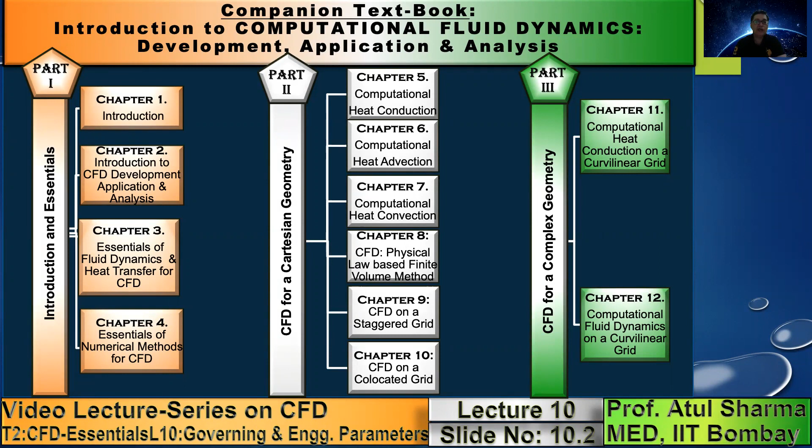This lecture 10 is on governing equations and engineering parameters, which corresponds to the topic 2, essentials for computational fluid dynamics. This topic corresponds to the chapter 3 of the companion book, the essentials of fluid dynamics and heat transfer for CFD. This lecture is the last lecture corresponding to the essentials of fluid dynamics and heat transfer for CFD.

So this lecture is on governing equations and engineering parameters. In the previous lecture, I had presented the essential concepts of fluid dynamics and heat transfer, starting with physical laws, where I had presented mass, momentum, and energy conservation laws, and the Fourier law of heat conduction and stress-strain rate relationship as the subsidiary laws.

After presenting the physical laws, diffusion and advection are presented as the transport mechanisms for momentum and energy transport. In the last lecture, the initial and boundary conditions, which act as a jury to any fluid dynamics problem and dictate the solutions, are presented. Finally, the last essential concept of fluid dynamics and heat transfer to learn CFD is presented in this lecture, which corresponds to governing and engineering parameters.

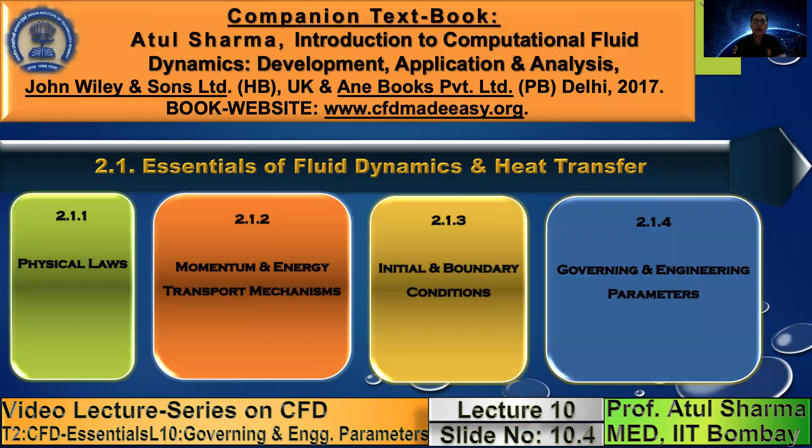Whenever you study a fluid dynamics problem or any problem, there are certain input parameters and there are certain output parameters. So these governing parameters are the input parameters and engineering parameters are the output parameters corresponding to a fluid dynamics problem.

The definition of these parameters: governing parameters are the input parameters that govern or affect the results in fluid dynamics. To give an example, if you consider flow across a car, then the speed with which the car is moving, the dimension of the car, or the fluid in which the car is moving. These are the parameters that govern the results, which may correspond to the flow field near the surface of the car, or the drag force which acts on the surface of the car.

So the speed of the car, the geometrical dimensions, and the fluid in which it is moving are the input parameters that govern or affect the result in fluid dynamics. If you change the speed of the car, the result, the flow near the surface of the car, as well as the drag force will change.

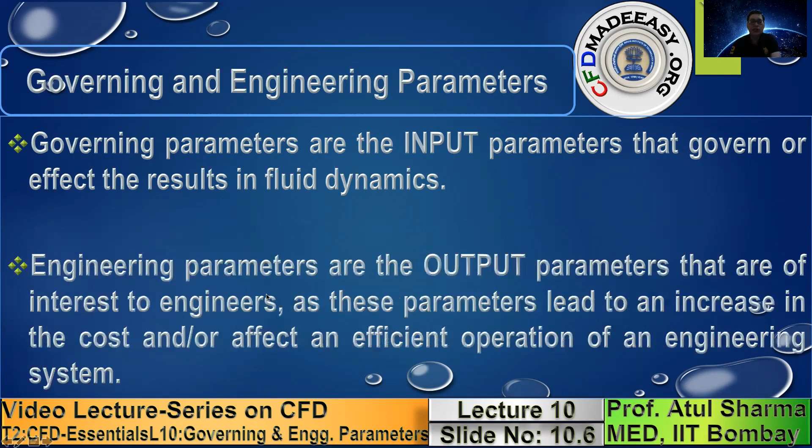Engineering parameters are defined as the output parameters that are of interest to engineers, as these parameters lead to an increase in the cost or affect the efficient operation of an engineering system. Again, if we consider the example of flow across a car, then the fluid dynamic output parameter which we are interested in is the drag force.

And the drag force leads to an increase in the petrol consumption, fuel consumption, which increases the maintenance cost. And if the drag force is large, then you have a low fuel efficiency. So it affects the efficient operation of the car as an engineering system. So this lecture is focused on input and output parameters corresponding to a fluid dynamics problem.

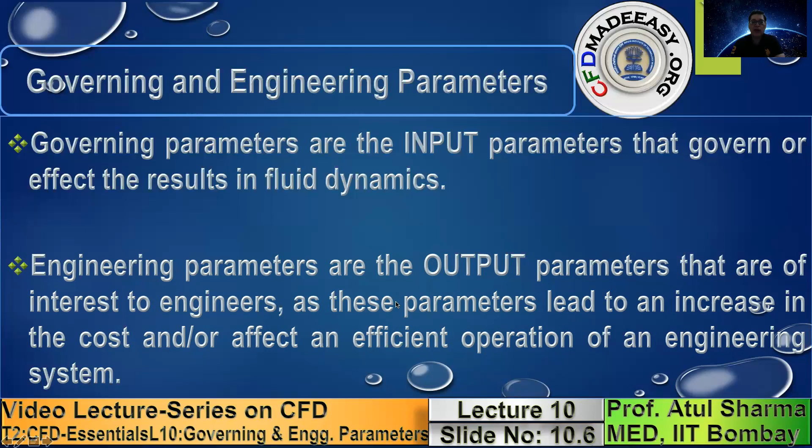Now there are three types of governing parameters. As I mentioned, the thermophysical property of the fluid considered for a fluid dynamics problem governs the solution. Along with it, whenever you solve a fluid mechanics problem, there is an interaction of a fluid flow with a solid. Like for flow across a car, the fluid is interacting with the surface of the car. If you consider flow in a pipe, the flow inside the pipe is interacting with the surface of the pipe.

And the geometrical parameters, like for flow in a pipe, the diameter of the pipe and the length of the pipe, govern the solution. For flow across a car, the dimension of the car affects the solution. So along with the thermophysical property, the geometrical parameter is another type of governing parameter.

Other than this, there are certain boundary condition related flow parameters. Like for flow in a pipe, the velocity at the inlet of the pipe is the boundary condition related input. And for flow across a car, the speed with which the car is moving is one of the boundary conditions which govern the solutions. These are the three types of governing parameters.

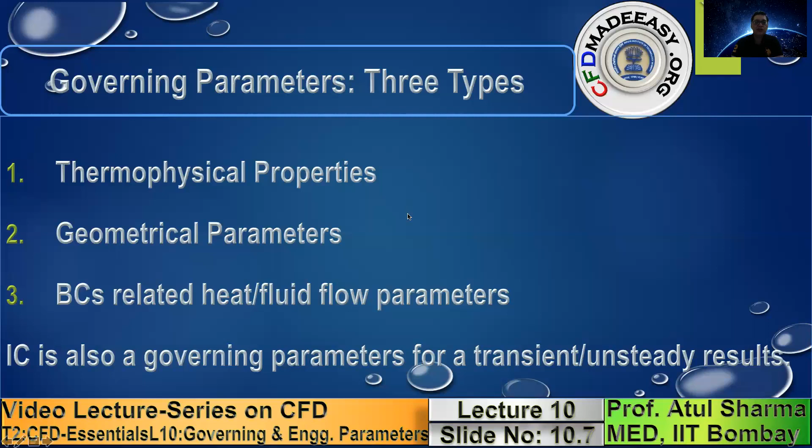After the input parameters, the engineering parameters which are calculated are mostly calculated at the surface or boundary of a solid for an external or an internal flow problem. Let us consider flow across a car, which is an external flow problem. The parameter is drag force. It is calculated at the surface or boundary of the car, by calculating the viscous forces and pressure force which act at the surface of the car, and we do the surface integration of these pressure and viscous forces. Similarly, for flow across an aeroplane, we consider the variation of pressure and the viscous forces on the surface, and then calculate the lift force.

If you consider flow in a pipe, we can calculate the pressure drop by calculating the wall shear stress or the shear force on the surface of the pipe. So in a pipe, we do the surface integration of the viscous stresses at the surface of the pipe. Whereas in case of an external flow, a car or an airplane, we consider the viscous as well as the pressure forces to calculate the lift and drag force.

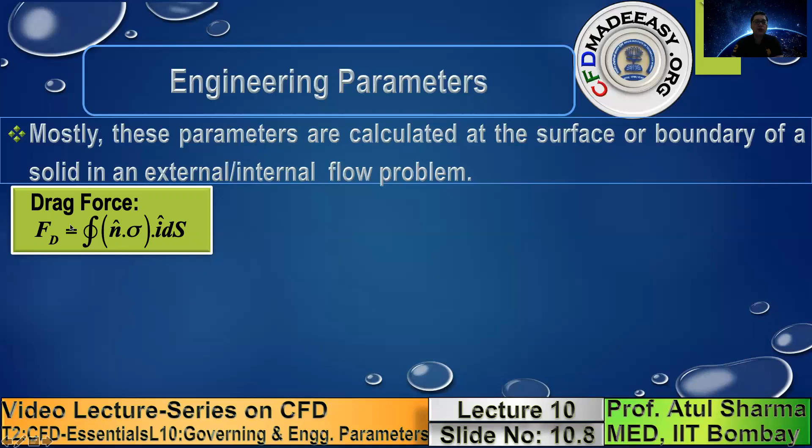So this output parameter involves the calculation of the parameter at the surface: for flow across a car, the surface is the surface of the car, and for flow across an airplane, it's the surface of the airplane. This is the expression for the surface integral which is used to calculate the drag force. This is a cyclic integral because we calculate the fluid dynamic forces, drag force as well as lift force, by considering the pressure and viscous forces all over the surface of the car. The complete surface is considered, so that's why it has been shown as a cyclic integral.

I will take an example problem for flow across an inclined plate to discuss this in much more detail, where in the integrand, sigma is the total stress which corresponds to pressure as well as the viscous stress, and n is the unit normal vector of the surface. However, the surface of the car is a curved surface. So if you take various points on the surface of the car, the direction of the unit normal vector will vary.

So the integrand here is a vector term because it's a product of the second order stress tensor with a normal unit vector, and I had presented in my earlier lecture that the dot product of a second order tensor with a unit vector leads to a vector. And if you take the x component by taking the dot product with the i unit vector, you obtain the x component of that vector, which is called the drag force, and the y component is called the lift force.

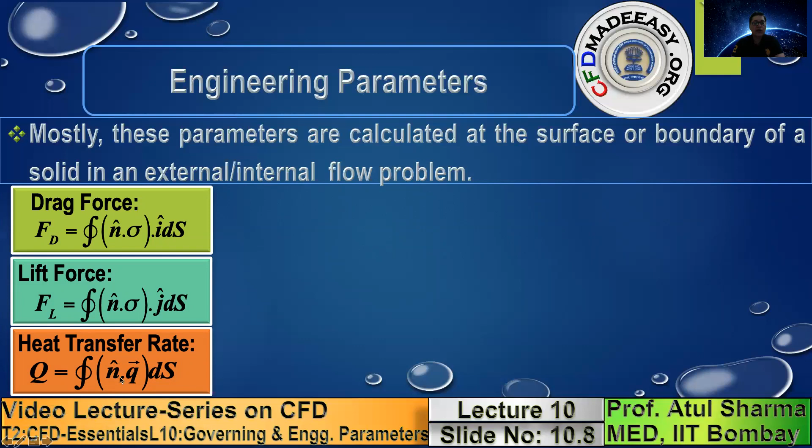Whereas in a heat transfer problem, the engineering parameter is rate of heat transfer. Now, to calculate the rate of heat transfer, we take the dot product of the heat flux as a vector with a unit normal vector. Note that this unit normal vector is corresponding to the surface, and with this we obtain the heat flux and we take its surface integral.

Now this n dot sigma operation is presented here for flow across an inclined plate. Let me explain the cyclic integral and what is this n, considering an example for flow across an inclined plate. This is a flat plate which is inclined, consisting of 4 surfaces, and the unit normal vectors are as shown here. These are the outward normals, n1. This is n2. This is n3, and this is n4. And we are considering a free stream flow across this

inclined flat plate. Now for this case, I am showing you the expression, this n dot sigma, for one of the surfaces. It could be top or bottom or left or right, where this unit normal vector in a 2D Cartesian coordinate system is expressed here as Ai plus Bj, and it is a dot product with a total stress. Now when you say total stress, you have pressure as well as the viscous stresses denoted by sigma xx, sigma yy. These are the normal viscous stresses, and sigma xy and sigma yx are the shear viscous stresses.

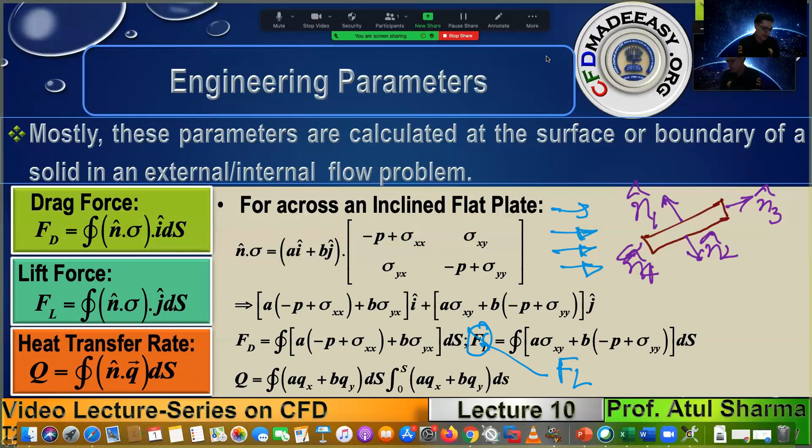Here, one thing to note also is that these viscous stresses: sigma xx is equal to 2 mu del u by del x, sigma yy is equal to 2 mu del v by del y, and sigma xy is equal to sigma yx is equal to mu times del u by del y plus del v by del x. So all these are viscous stresses. All of them involve the dynamic viscosity along with the velocity gradients.

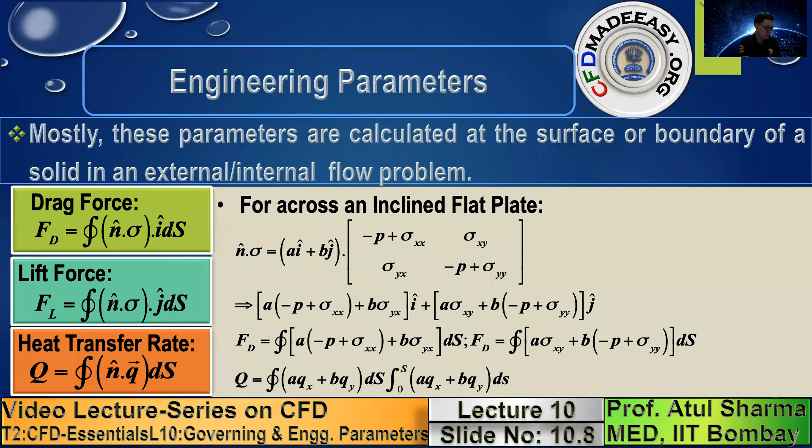So that was about the governing parameters and the engineering parameters. They were presented in dimensional forms. However, as I mentioned earlier, in any experimental or computational study, we prefer to present our results in a non-dimensional form. So as shown here, experimental as well as numerical results are presented in a non-dimensional form, since they are applicable to various fluids and a large range of length and velocity scales.

When you do an experiment, you have to take a particular fluid, a particular geometrical dimension. So that way, the experiment is always dimensional in nature. However, when you are doing a computational simulation, you have the luxury and freedom that you can set up your computer program in such a way that you can do computer simulations in a non-dimensional form, which is not possible in an experimental situation.

However, whether it's experimental or numerical, you can perform the experiment or simulation dimensionally also. Once you get the result, you can map it to a non-dimensional form. So finally, most experimental and numerical studies present their results in non-dimensional form, because for flow across a cylinder, if you are doing an experimental or computational study at a Reynolds number of 100, you can claim that your result is applicable for a wide range of fluids, a wide range of cylinder diameters, and a wide range of free stream velocities.

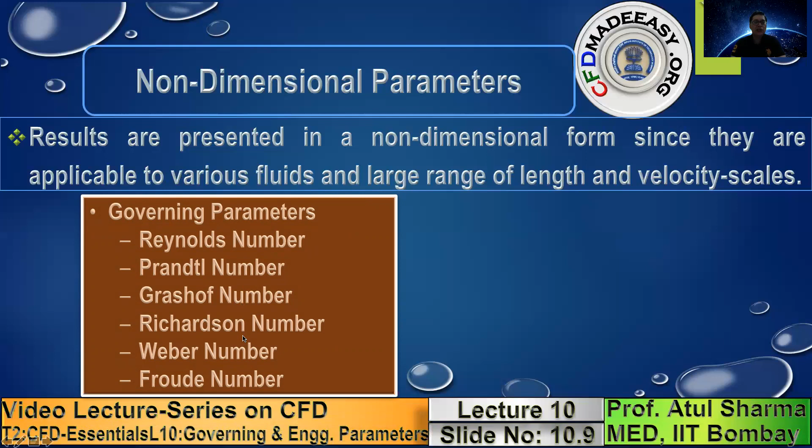So both geometrical parameters as well as the governing parameters are presented in a non-dimensional form. Now I'll present the non-dimensional governing parameters and non-dimensional engineering parameters. The non-dimensional parameter commonly used in fluid mechanics is Reynolds number. Prandtl number is a non-dimensional governing parameter which comes in forced convection. Grashof number comes when you study natural convection. Richardson number appears in the study of mixed convection, whereas Weber number and Froude number appear if you study

multi-phase flow. Reynolds number corresponds to the ratio of the inertia force to the viscous force. Prandtl number is the ratio of the kinematic viscosity to thermal diffusivity. Grashof number is the ratio of the buoyancy force to the viscous force. Richardson number is expressed as Grashof number divided by Re squared. Weber number corresponds to the ratio of the inertia force to the surface tension force. And the Froude number is the ratio of the inertia force to the gravity force.

So these are the various non-dimensional input or governing parameters that come in a problem. If it's a pure fluid flow problem, for most problems you have a Reynolds number. If it also involves heat transfer, then you find Prandtl number for forced convection, Grashof number for natural, and Richardson number for mixed convection. All these are for single phase flow. If it's a multi-phase flow, then you encounter two additional parameters, Weber number and Froude number. So these are the non-dimensional input or governing parameters.

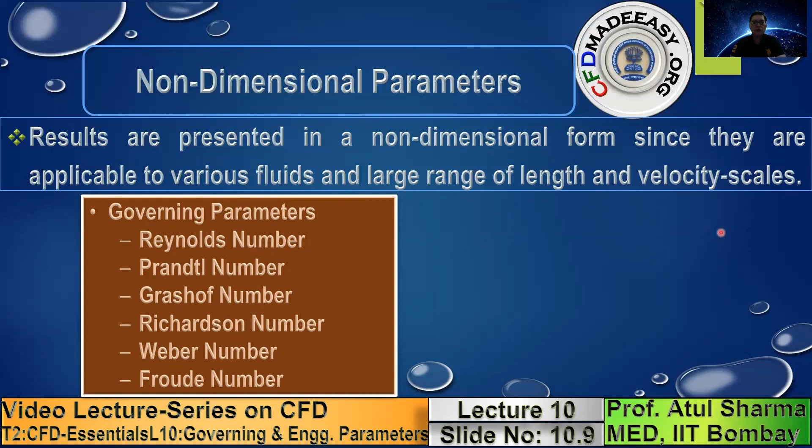Now the non-dimensional engineering parameters are shown here. The skin friction coefficient is a non-dimensional representation of wall shear stress, commonly studied for internal flow like flow in a pipe. The friction factor is a non-dimensional representation of pressure gradient for internal flow such as in a pipe. The drag coefficient is a non-dimensional representation of drag force, which comes into the picture in external flow like flow across a car or an airplane. Similarly, lift force also comes into importance for an external flow problem.

The Strouhal number is a non-dimensional representation of the frequency of a periodic flow. For flow across a cylinder, there is a periodic flow corresponding to the vortex shedding phenomenon, and the frequency of the vortex shedding is represented in non-dimensional form by the Strouhal number. Nusselt number is a non-dimensional parameter which appears in heat transfer. For constant wall temperature, it is a non-dimensional representation of rate of heat transfer; for constant heat flux, it is a non-dimensional representation of the wall temperature. So these are the non-dimensional governing and engineering parameters. This is input parameter, this is output parameter.